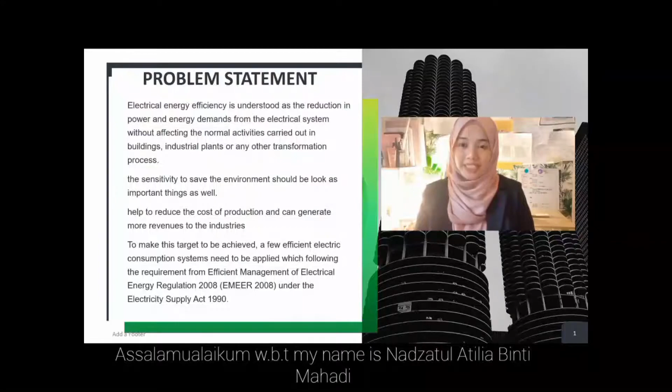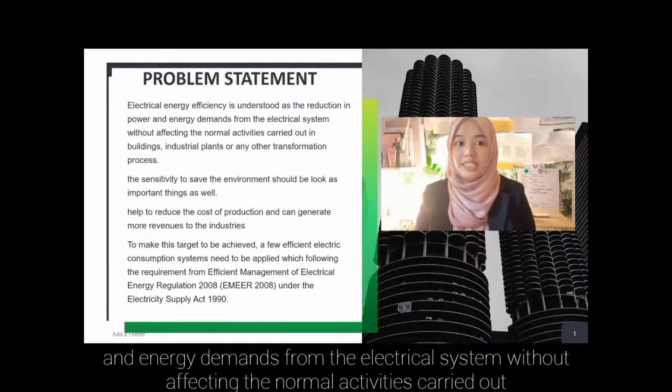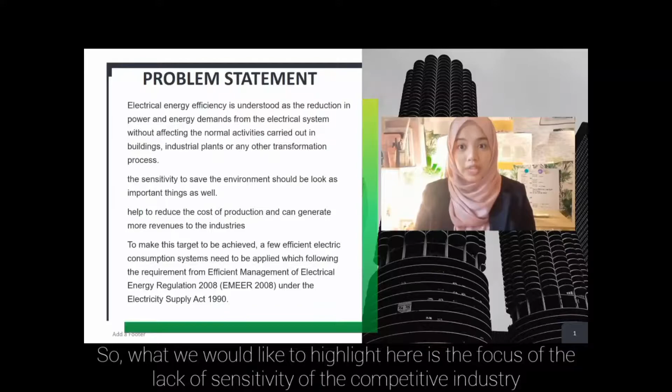In the problem statement of the proposal, electrical energy efficiency is understood as a reduction in power and energy demands from the electrical system without affecting the normal activities carried out in the building, industrial plants, or any other transformation process. So what we would like to highlight here is the lack of sensitivity of the competitive industry to save the environment should be looked at as an important thing as well.

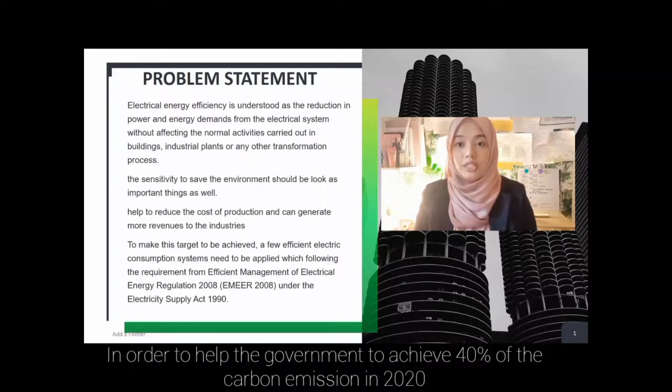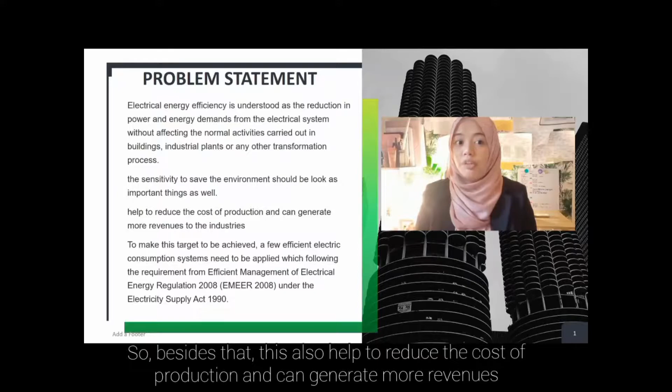This is in order to help the government achieve 40% reduction of carbon emission in 2020. Besides that, this has also helped to reduce the cost of production and can generate more revenues for the industry if the industry applies and implements an energy efficiency system.

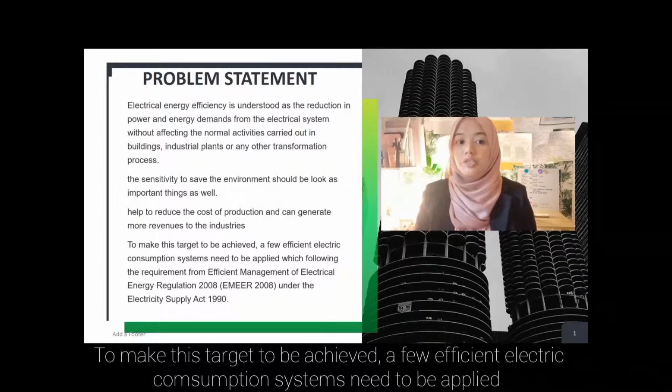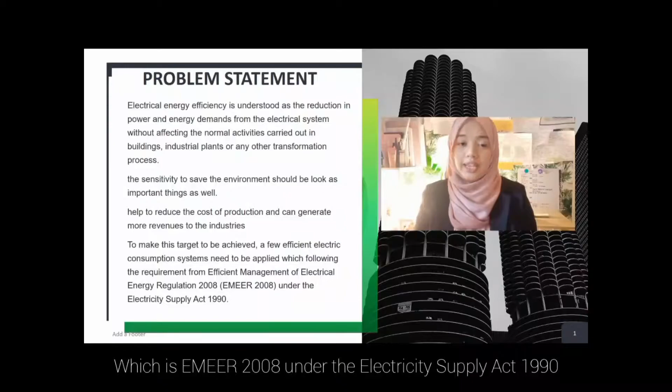To make this target achievable, a few efficient electric consumption systems need to be applied, following the requirements from the Efficient Management of Electrical Energy Regulation 2008 (EMEER 2008) under the Electricity Supply Act 1990. Thus, the Efficient Management of Electrical Energy Standard Regulation is a regulation to regulate the electrical energy used by consumers and generators with certain requirements to fulfill for better energy management.

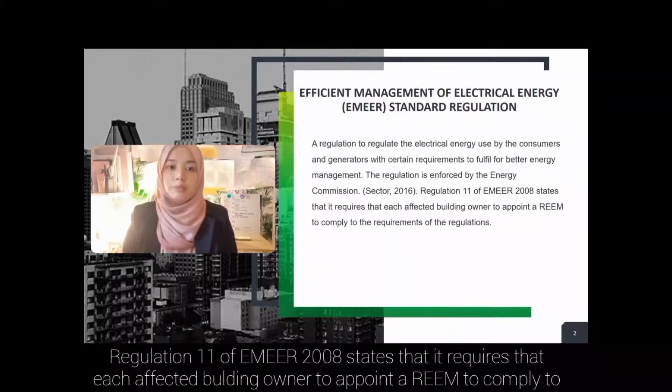The regulation is enforced by the Energy Commission Sector 2016. Regulation 11 of EMEER 2008 states that it requires each affected building owner to appoint a REEM to comply with the requirements of the regulation.

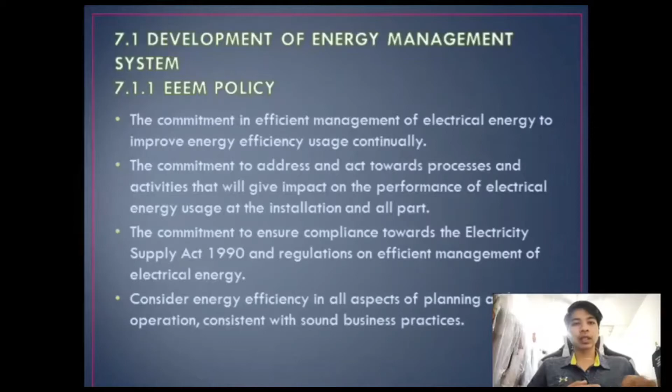Next is Certified Energy Manager. A Certified Energy Manager is an individual who optimizes the energy performance of a facility, building, and or industry plant. CEMs are often team leaders and help to develop and implement the organization's energy management and strategy. CEM has gained increased recognition within the energy industry, with companies looking to strengthen their competitive position by having a CEM on staff.

This is the EEEM committee. The chairperson is Muhammad Sharifuddin bin Abdul Rahman. There are two secretaries, which are Nazatul Atilia bin Mahdi and Muhammad Dini bin Khairul. The utility maintenance engineer is Muhammad Ishaq bin Abdul Razak. Human resource manager is Nurul Fadilah bin Qasim, and accounting and purchasing manager is Siti Aisyah binti Muhammad Jamal.

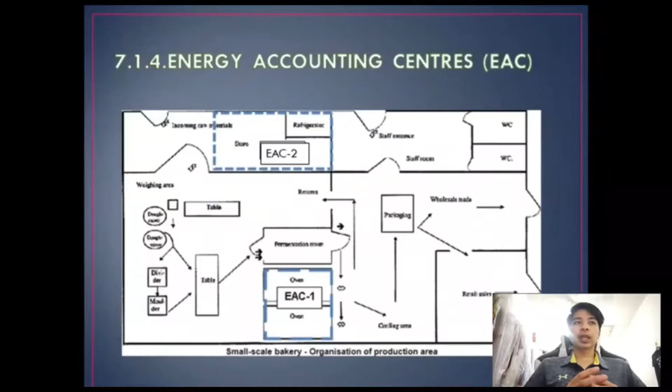Next, after that is the Energy Accounting Center. You can look in the picture, which is machine EAC-1, oven and stove. Plant recorded data shows working hours of 7 to 8 hours daily and power consumption. Another one is EAC-2, chiller, which is operated daily with high electrical power consumption.

I am Nurul Fadila, Human Resource Manager. I will present about the information system, energy management working procedure, the training and awareness session, and also the documentation.

So in order to acquire a proper SEMS, the information system on how energy performance is monitored and reported has to be identified. Firstly, the information system can be set up by sharing the data and knowledge among the energy management committee members. The key indicator for energy performance is the monthly energy consumption for the company and each EAC, as well as the monthly maximum demand charged by the TNB.

From the energy consumption data obtained from the TNB bills, the EEI could be calculated so that the energy performance can be evaluated and compared. The information system must not only rely on the meter reading but also the physical system at the installation site.

The person in charge for each EAC will also report to the operation manager if there is any issue related to the energy consumption meters. We'll also use posters, memos, and send emails to the staff, 3 to 4 times a year, to inform them about energy saving.

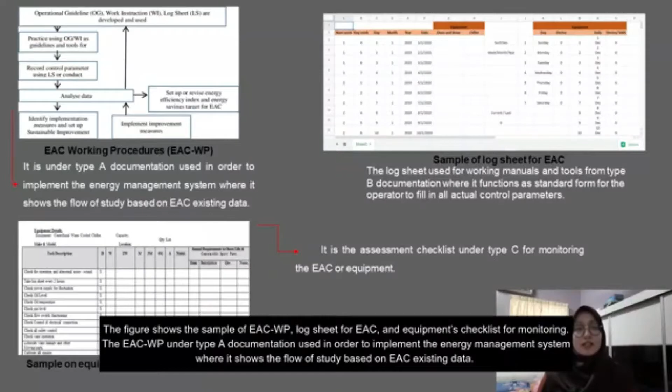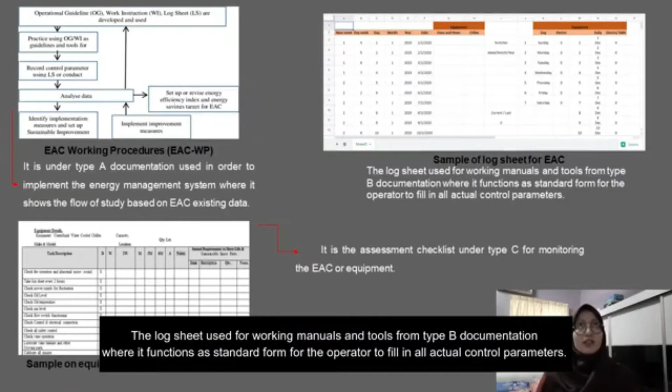The log sheet used for working manuals and tools from the Type B documentation functions as the standard form for the operator to fill in all actual parameters.

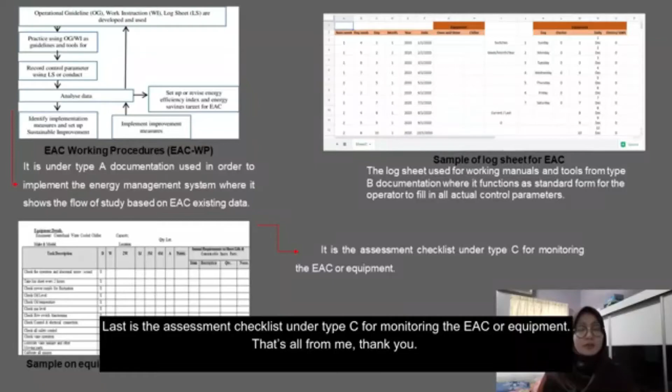The assessment checklist under Type C is for monitoring the EAC or equipment. That's all from me, thank you.

Assalamualaikum and greetings. I'm Siti Aisyah, and I hold the position of Accounting and Purchasing Manager. I am responsible for securing funding, cost of the project, and financial plan in order to implement the SEMS project. First, let's start on how the funding for development of SEMS is secured.

The funding is divided into two types: internal funding and external funding. Internal funding is the company funding from savings, asset liquidation, and revenue. The external funding, we propose funding from the Energy Service Company, or ESCO, where they provide resources and expertise to implement the necessary measures from formulating until monitoring.

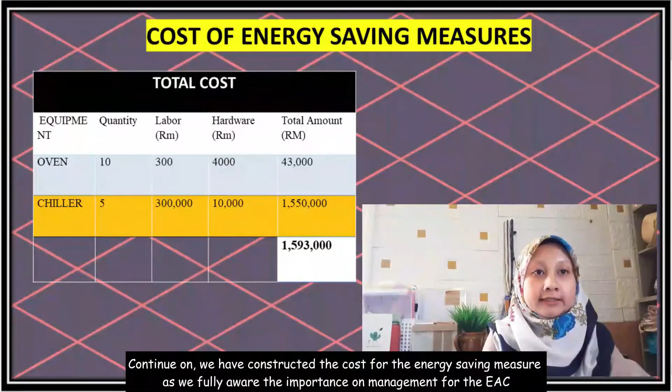The process done, we have also constructed the cost of the energy saving measure, as we are fully aware of the importance of management for the EAC. Therefore, here is the cost or investment needed to purchase the infrared oven and chiller.

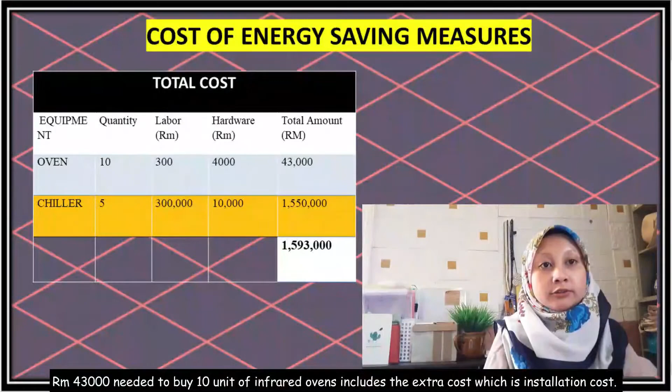RM43,000 is needed to buy 10 units of the infrared oven, including extra costs such as installation, while the chiller costs almost 1,550,000 for 5 units, as the price per unit is quite costly at RM10,000.

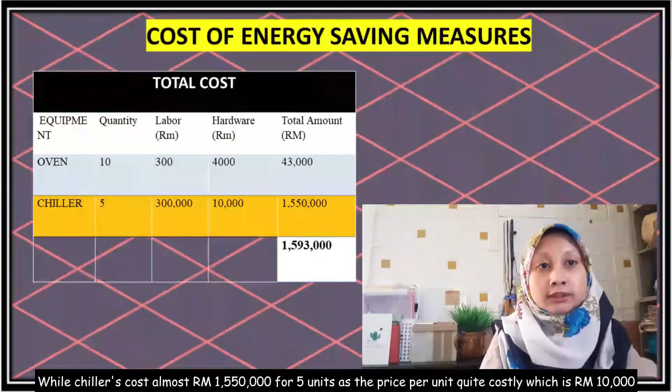As a result, 1,593,000 is the total cost needed to purchase both pieces of equipment.

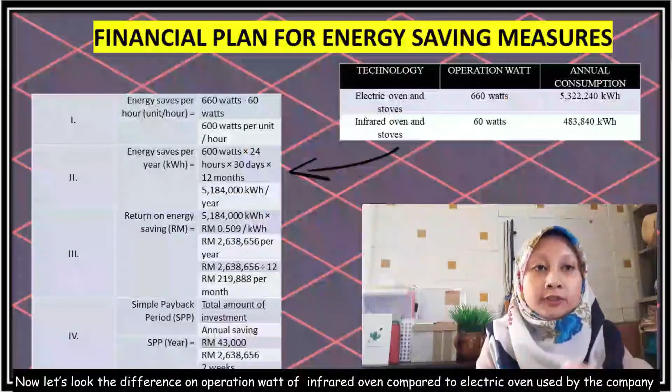For the financial plan, we focus on formulating energy saving, return, and payback period from the investment made. Let's look at the difference in operation watts of the infrared oven compared to the electric oven used by the company. By subtracting the operation watt value of the infrared oven from the electric oven, there are 600 watts saved per hour, showing more than half can be saved.

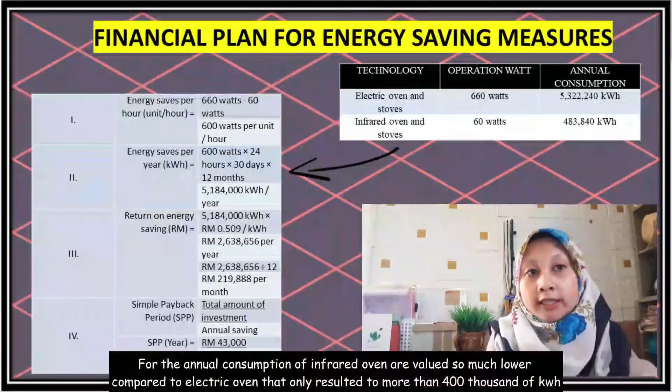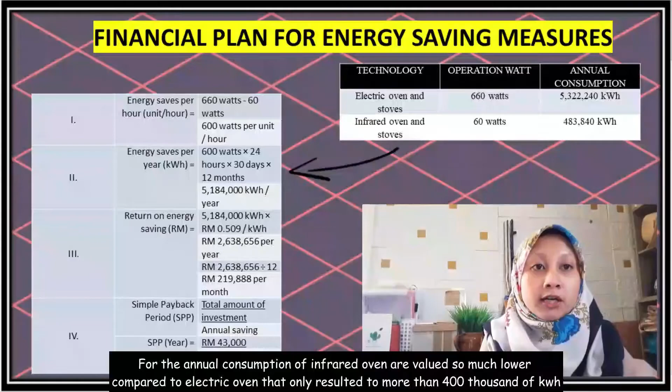For the annual consumption, the infrared oven is valued much lower compared to the electric oven, resulting in more than 400,000 kWh. This results in huge energy savings.

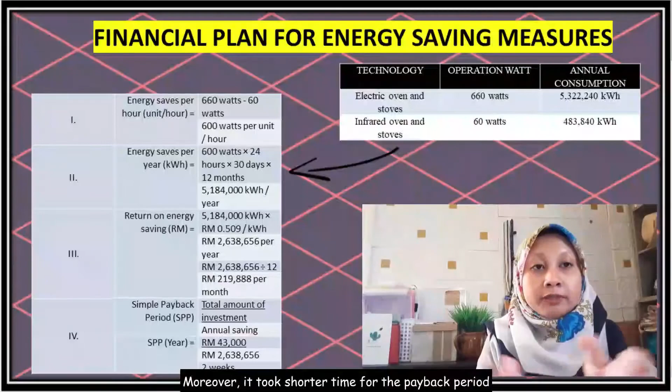We'll be able to save more than 5 million kWh and also more than 2 million ringgit Malaysia per year. Moreover, it took a shorter time for the payback period, only 2 weeks, to recover the cost of investment from the project.

For the replacement of the chiller, we propose to purchase a 3.5 HP chiller for high efficiency for the machine to operate.

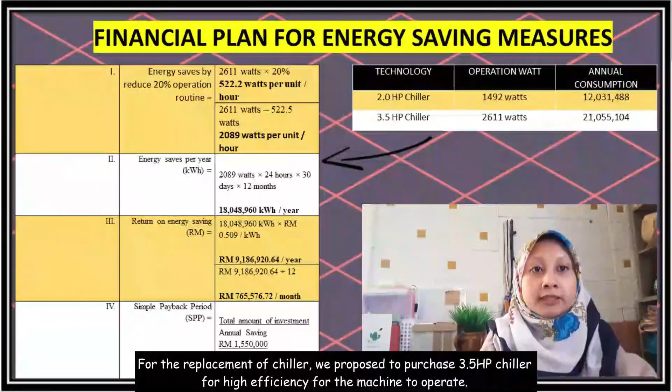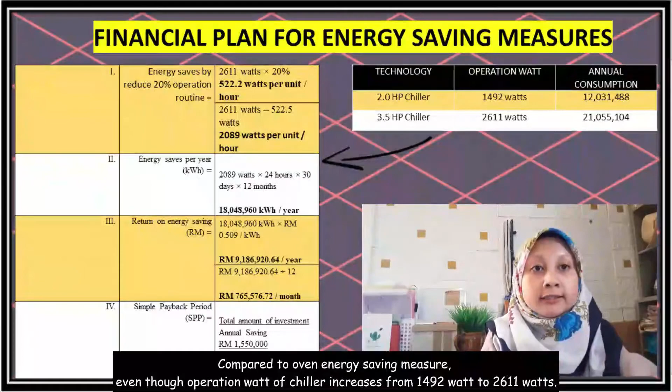Compared to the oven energy saving measure, even though the operation watt of the chiller increases from 1,492 watts to 2,611 watts, by practicing the best routine management and monitoring, the electricity consumption can be reduced, assuming at least 20% energy reduction by minimizing routine operation.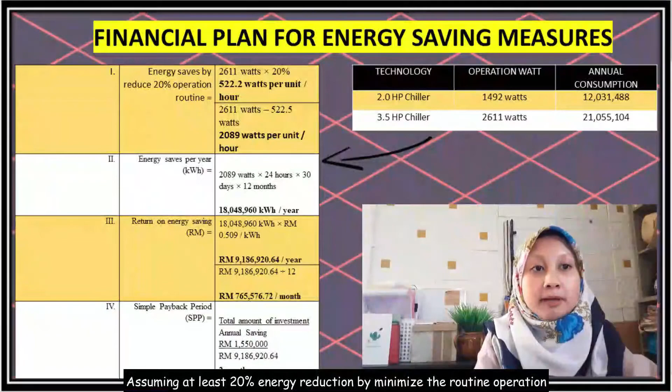Per machine can save 522.2 watts per hour. As a result, more than 18 million kilowatts, or even more than 9 million ringgit Malaysia, are being saved in a year.

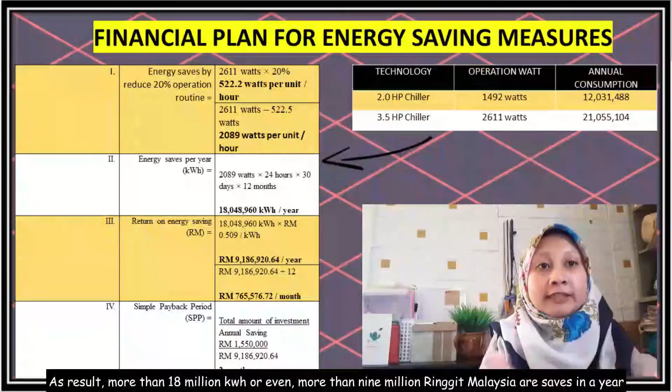Even the payback period only took 2 months to earn back the cost from the investment. Alright, that's all from me for the securing funding, cost measure for the project, and the financial plan. Thank you.

Assalamualaikum everyone, I am Muhammad Ishak bin Abdul Razak, operational manager. Now I want to talk about expected result, measurement and verification method (MNV method), and project concept master planning. So we go through the first slide, about expected result.

So what is expected result? Through the effort to implement energy saving measures, we estimate the energy consumption based on the baseline year, which is 2019. Cumulative sum, also known as CUSUM, is a technique used to estimate the actual energy consumption in order to monitor energy performance as well as quantify energy saved or wasted.

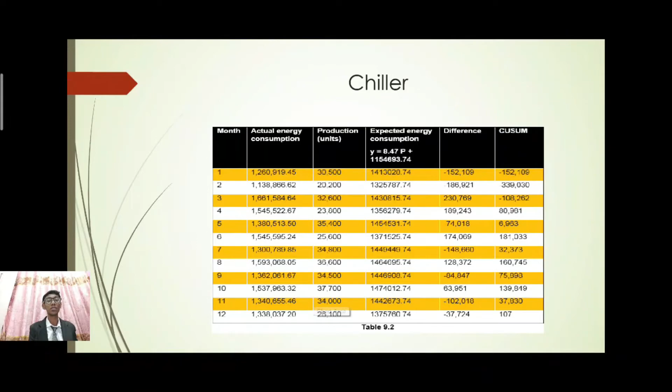We go to the next part, which is the measurement and verification method, also known as MNV.

Measurement and verification, which is MNV, is the process of using measurement to reliably determine actual savings created within an individual facility by an energy management program.

The International Performance Measurement and Verification Protocol, which is IPMVP, describes 4 broad MNV categories, which are option A, B, C and D. My company has chosen option A for the chiller and oven.

As for the chiller and oven at Arista Solution Sdn Bhd, we plan to opt for a retrofit isolation method and choose option A, which is known as partially measured retrofit isolation. The retrofit isolation method requires full measurement equipment to isolate the energy used by the equipment affected by the ECM from the energy used by the rest of the facility.